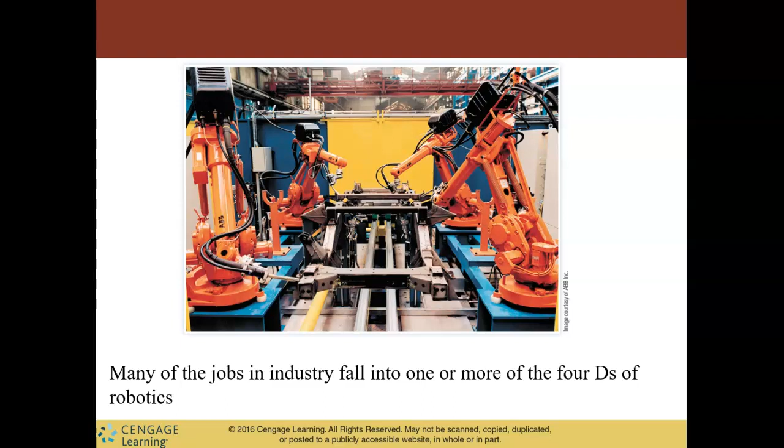Robots have certain strengths and weaknesses. They are extremely precise and consistent, and they don't tire. Some parts may eventually wear, but they don't get fatigued the way humans do. They are immune to emotional situations. So in some ways, they can be superior to a human employee.

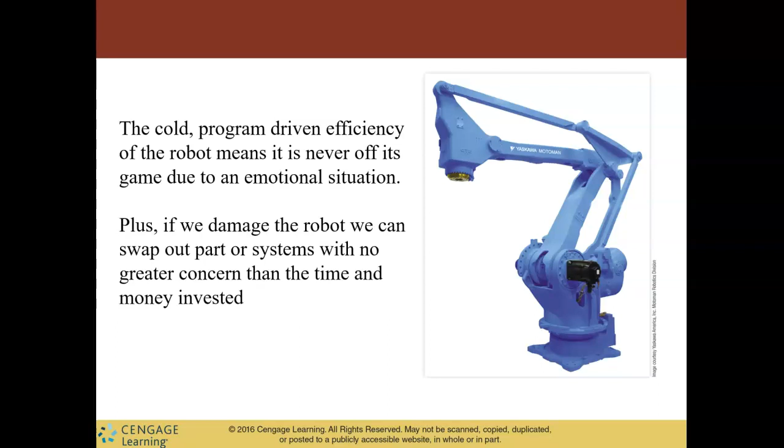Now, of course, there is a bit of an ethical question here. If we replace human labor with robots, are we not putting these people out of a job? Is this not harmful to our economic society? Although that argument could be made, the textbook author does bring up some arguments against that.

The one thing he points out is that businesses need to be profitable. If they're not profitable, they do not stay in business, and then nobody has a job. So if it makes financial sense to purchase a robot in order to increase profitability, that will be the choice that the business makes in order to remain viable.

Secondly, an argument can be made that although certain positions may be replaced by a robot, the purchase of a robot can also create job opportunities. Robots do not simply work on their own. They need a support staff. Someone needs to program the robot and maintain the robot and operate the robot. So there are other jobs created by robots.

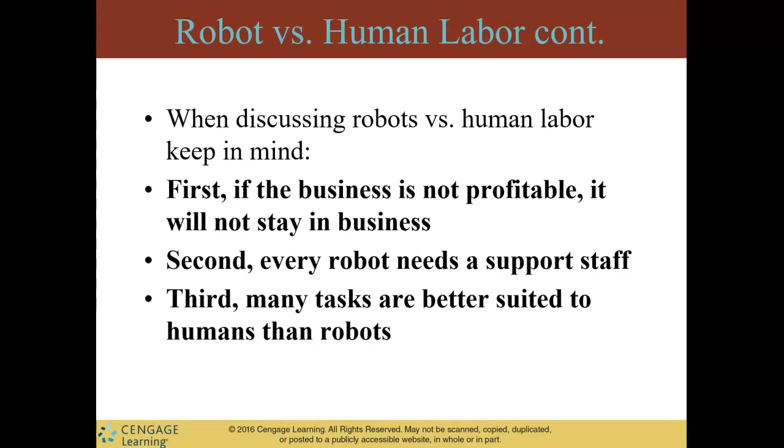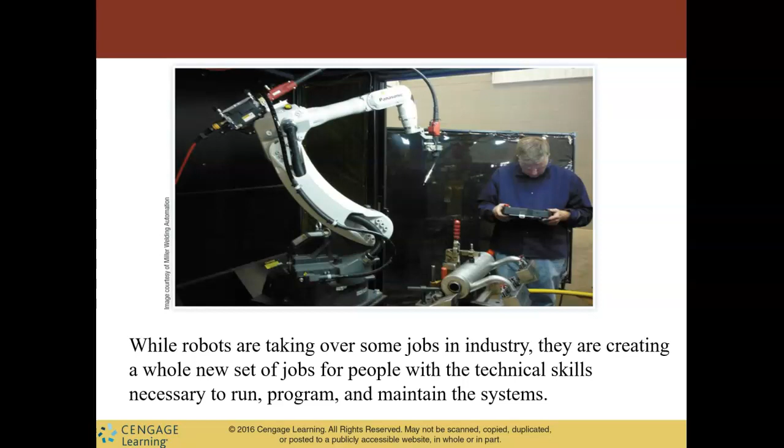So this slide just reinforces that idea that although they are taking some jobs in industry, they're creating other jobs, and there will always be jobs that require a human. So we need not be concerned that robots will take all of our jobs.

So, to justify the financial purchase of a robot, a business must determine what the return on investment is. Robots are many things, but cheap is not one of them. It sometimes costs a considerable amount of investment to not only purchase the robot, but to maybe install the robot, to modify your production facility, to hire employees to operate it, or to train existing employees.

So there's certainly a financial investment when purchasing a robot. The business has to then calculate how much money the robot is going to either make or save in the future in order to determine if this purchase is worth it. Sometimes this is more easily calculated by others, more easy in some situations than others.

So you can look at the cost savings of human labor. If you are purchasing a robot that is going to do a job that was previously done by humans, then you are going to be saving the money you would have paid those employees, including their benefits and all of that. The robots work longer hours, they don't tire out, things like that will create some savings. You can also look at it on a part by part basis. Robots might be more efficient, they might have better production numbers, so that might help increase its return on investment.

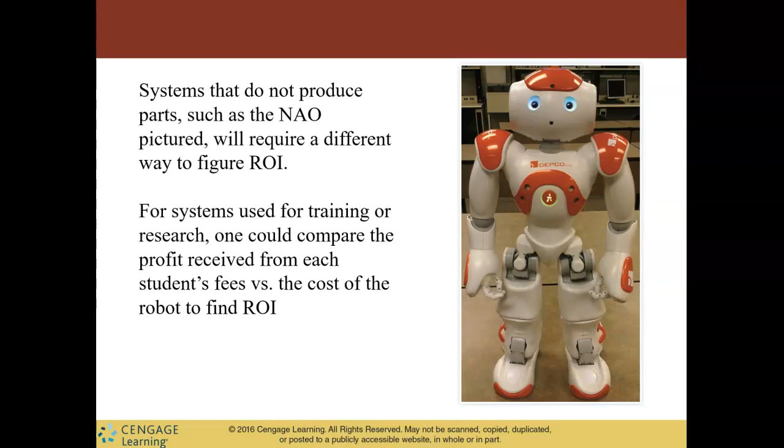Another way to consider return on investment is payback period. How long is it going to take to recover the funds spent on the investment? Shorter payback periods make it more desirable.

Keep in mind that robots will not necessarily last forever. They may eventually become obsolete, and they may eventually need to be replaced rather than maintained. Maintenance costs might increase. But having said that, there are some examples of industrial robots in service that have been used for decades and have outlived their predicted lifespan. So just keep in mind that some robots last longer than you might expect.

Sometimes when you crunch the numbers, if you're a business owner, you might find that the cost is just too much, that the robot is too expensive. If that is the case, then you have some options. One is to just say, well, I considered it, but it's just not going to work out, and so you don't purchase a robot. Continue to do things the way you have done it before.

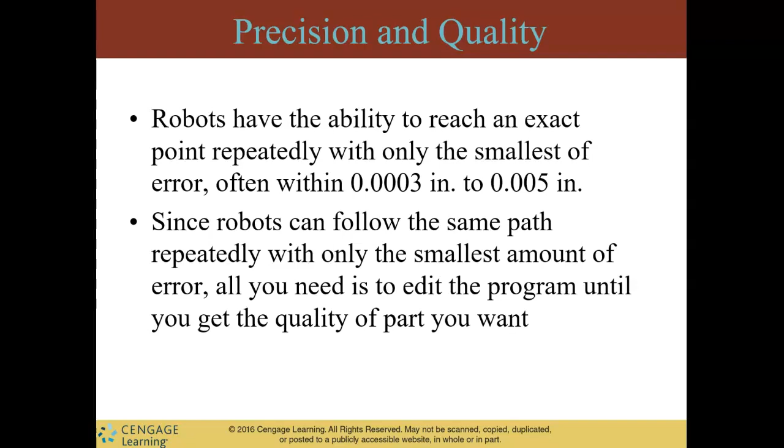So if you have detailed, repetitious activities, robots are going to perform those activities faster, more reliably, more consistently, more precisely than a human counterpart.

With the assistance of a robot, you can make some pretty complex parts with a relatively low skill level employee. In the next slide, we'll see a robot used for welding. It requires less skill to set up the robot to do the weld than it would to do the weld yourself. Welding is certainly a highly skilled occupation, so the robot can allow employees to do things they would not be able to do without it.

Because of the reliability and consistency of a robot, you're less likely to create bad parts, so you save money by not having to scrap as many. If you didn't have a robot and were occasionally making some bad parts that left your factory, every time a bad part gets into the hands of a customer, they are going to be dissatisfied, and that can have a cumulative effect on your business.

As I mentioned, setting up a robotic welder can take some time, and it does take a certain skill to program and set up the robot. But once that program has been tweaked and perfected, a few hours of working on the program can turn into weeks of perfect parts — perfectly consistent, repeated welds over and over again. So the robot allows you to be more consistent and do things you wouldn't be able to do without it.

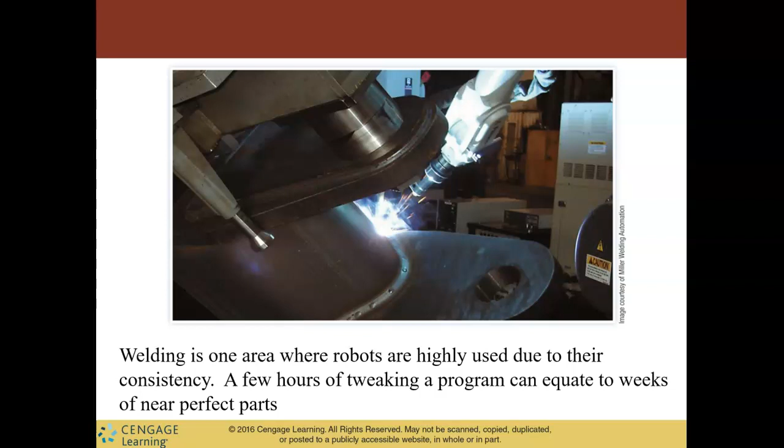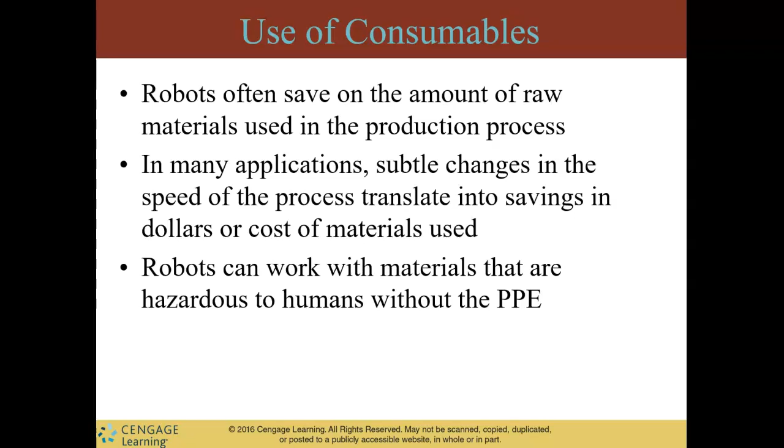This consistency and reliability saves on raw materials. In the case of spray painting, for instance, a robotic spray painter can do it so efficiently that you use less paint. It also allows the robot, because it's not human, to work in dangerous situations.

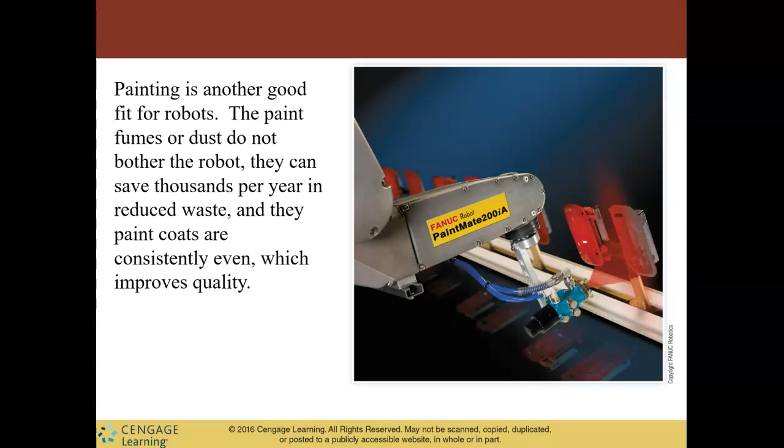Again, a huge advantage that robots have over people: they don't get injured, they don't get sick. They're not affected oftentimes by situations that would be very harmful to humans. So hazardous environments and dangerous jobs are well suited for robots.

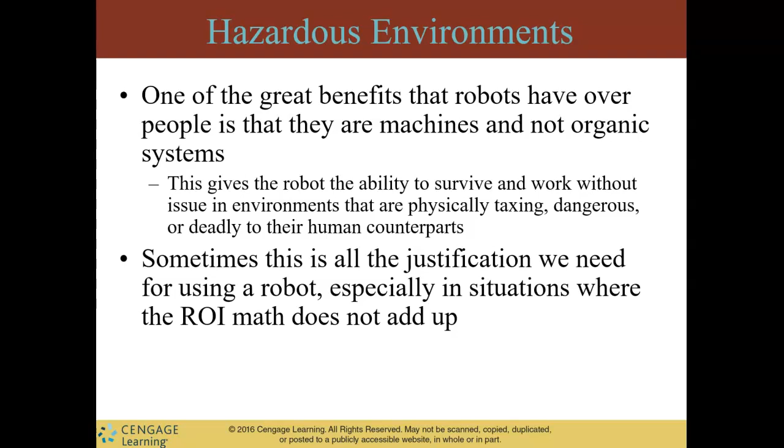I am going to stop right here and finish this lecture in the next video.